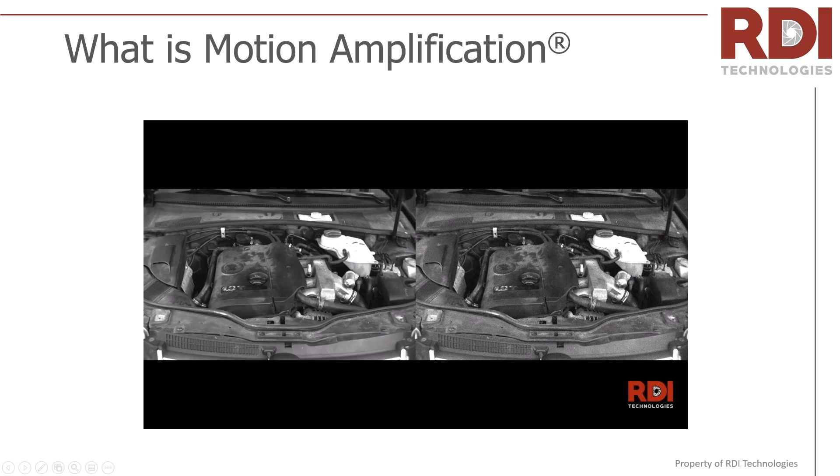So if you look at a car engine, you would essentially see not a whole lot. But with a motion amplification video of a car engine starting, you can actually see that. So there's the car engine starting. If cars aren't your thing, maybe motorcycles, you can look at a Harley. I didn't shoot this, but I'm told you didn't really need a whole lot of amplification for a Harley. But nonetheless, there's a Harley motion amplified.

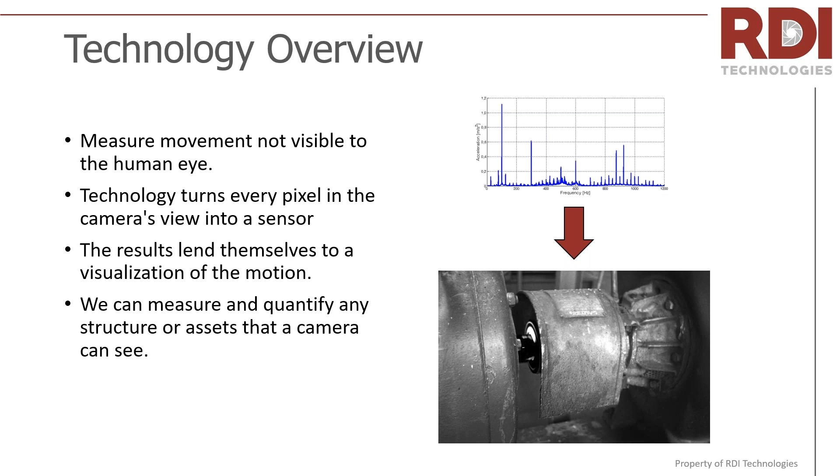So we're making motions that are invisible to the eye visible to the eye, essentially turning each pixel in the camera into a sensor, and then making a visualization of that. And then we can quantify that as well.

Just a little bit else in terms of the use or the benefits. If you go into traditional vibration, if you put one sensor down, that tells you a lot of information and you get a lot of value from that. You can put a second sensor down, and then you can do interesting things like phase, and you get more, and then a third channel.

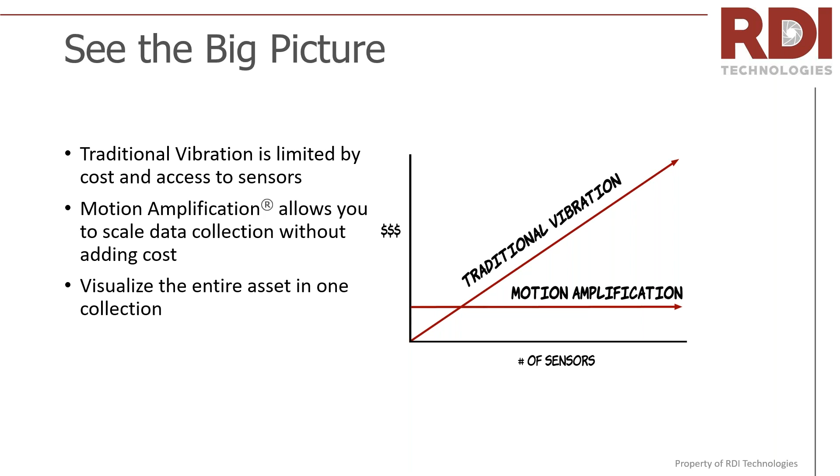And then you can start to outfit an asset, but it becomes kind of expensive and cumbersome if you start adding more and more sensors to an asset. So by the time you're up to a dozen or two, that's hard to manage in data and the collection. But with motion amplification, you can think of the pixel as being the sensor, and you add 1 pixel, 2 pixels; a megapixel is kind of a thing of the past even, where we're up to lots of megapixels. So you can add pixels and then increase your sensor coverage across the entire asset very, very simply.

So a little bit about some technical specifications. We're really measuring fundamentally displacement. That displacement measurement makes it really handy as a complementary tool to accelerometers. Accelerometers are a very common measuring device in this industry, and so now we add this displacement measurement, and it's a really good complement.

The system's capable of live motion amplification, and I'll do a demonstration of that. You set the camera down, and instantly you can see the amplification. You can amplify up to 500 times, and then you can show the overall and frequency-based motion. So you're not just limited to show one frequency or another or combination. The first video that you see is overall. It's all the motion, so that's really important because you need to make a decision about what you're looking at and to be able to see them all.

So it's really small detection capability, 0.01 mils. So really, the system's capable of seeing anything of interest or concern, and then some of the frequencies there that you can measure too. And then also it measures 2 axes. So you get an up, down, right, left measurement, and it's synchronous across the entire image. So that's really kind of cool because now you can do phase relationships. Everything is taken at the same time. So you can make a measurement in the right side of the image and the left side of the image and compare those.

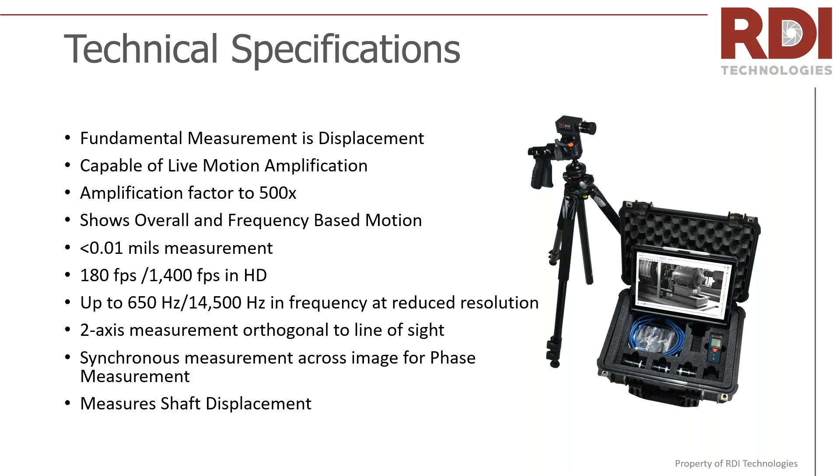And it also has the capability of measuring shafts while they're rotating. So a lot of people use it for measuring what we call the operational run out, while it's in operation, how much that shaft is moving. So a little bit about the family of what they are. The IRIS-M is, I would say, the standard motion amplification camera. You can add an MX to it. That's really just adding higher frequency. So if things are moving faster, you can see those things.

And then also the CM, which stands for continuous monitoring. 3 cameras simultaneously collecting, can do 90 minutes of data per camera in buffer, so it's kind of like a DVR. So that's kind of handy for lots of different reasons. It even does triggering with optical sensors. So you can draw a box and it will monitor that area continuously, and if something moves in that area by a certain amount, it saves the video, pre and post that trigger. So again, it's sort of a crash cart; you can put it on an asset and monitor overnight, a week, 2 weeks, however long you want.

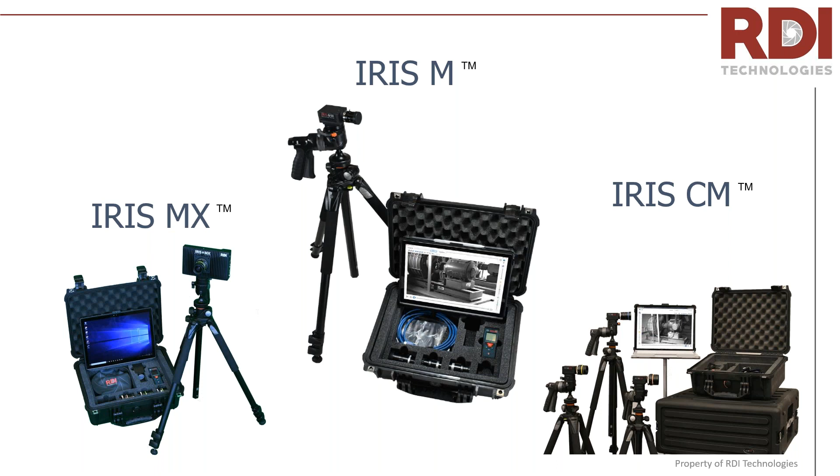Some of the benefits of the technology: it really is a root cause complementary tool. Motion amplification is not something that's going to replace the existing tools. You're still going to have your accelerometers, your ultrasound, your infrared. It's really just another tool in the toolbox that complements those other tools, and I'm going to talk through some of that and hopefully show you how it becomes a complementary tool.

It's a really advanced and sophisticated data analysis piece, but I also like to think of it as 1 part data analysis, 1 part communication tool. Because one of the nice things about it is that it can really help communications between technical and non-technical users. It's really easy to show someone that something's misaligned or something's loose just by a video.

I had one user tell me that he had been trying to get something fixed for 3 years, and he knew what the problem was. He had been working on it for 3 years, and he couldn't get action taken because the people that had to buy into it were not technical, and they didn't really understand. And so shortly after he started using the camera, he was able to show the video, and then immediately got that asset fixed. So that's a really powerful piece of that.

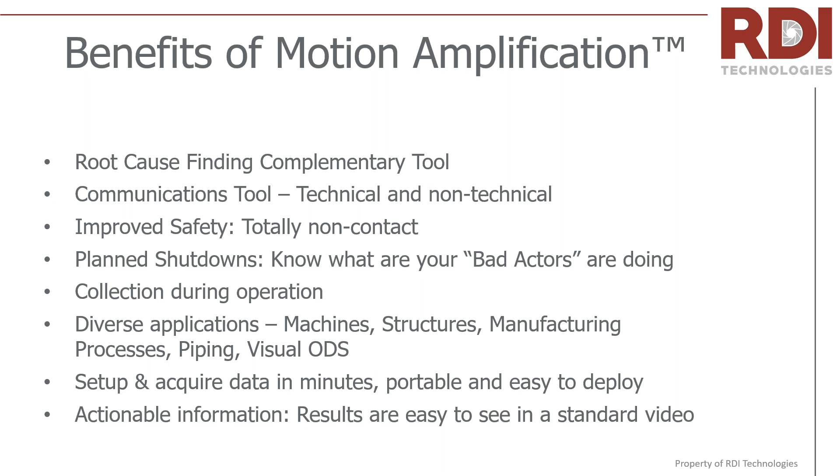A little bit about the industries. It doesn't have one preference for where people use it. Anywhere from pulp and paper to water treatment, automotive, and essentially anything that's moving. It's a very fundamental measurement type. It's measuring displacement, so it finds its home in a lot of different areas.

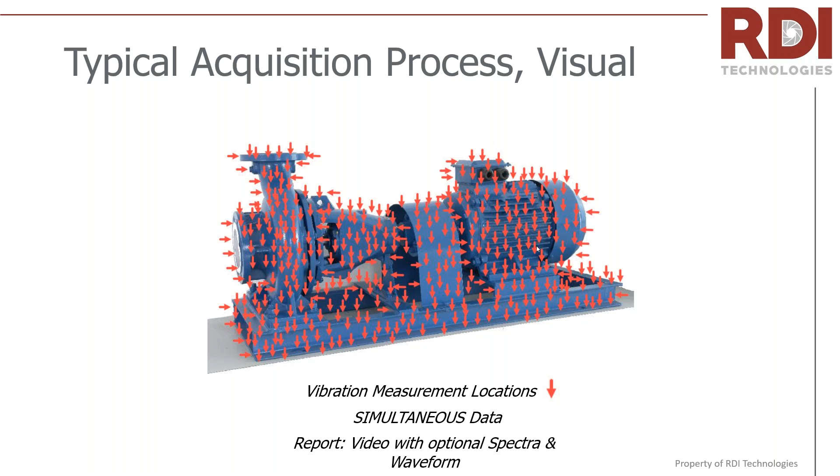It's a really cool tool for the you-don't-know-what-you-don't-know sort of thing, and I'll talk about that later in more detail. Sometimes you see things that you weren't even looking for, you didn't know were there, and it wasn't what you were focusing on, but it ends up being the biggest problem. Again, because you're looking at more than one location.

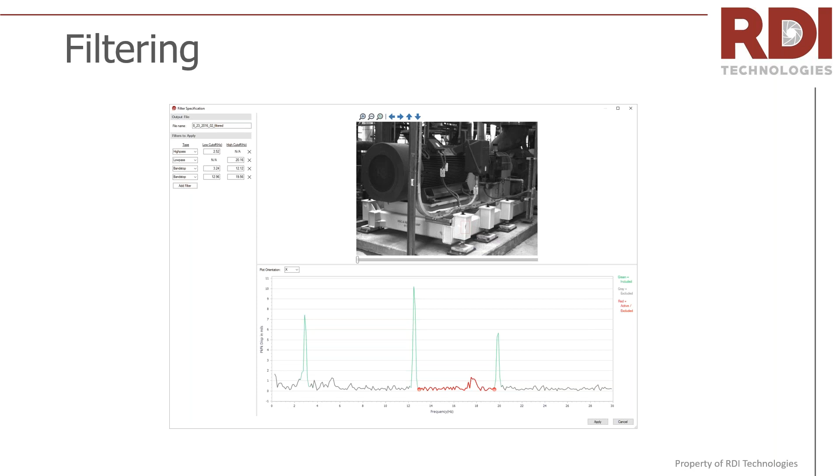So some of the core pieces with this. It's the filtering here. You notice there's a spectrum. You can draw a box anywhere in the video and make a measurement, and it gives you a time waveform in both the X and the Y, a frequency spectrum, and an orbit. You can draw as many as you want and do comparisons across different areas. But this is filtering. You can create any combination of filter you want if you only want to show certain frequencies. I'll walk through a short video about filtering.

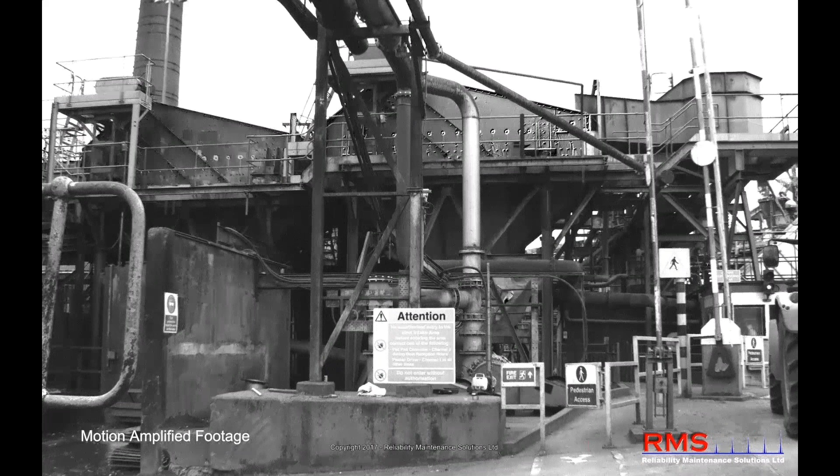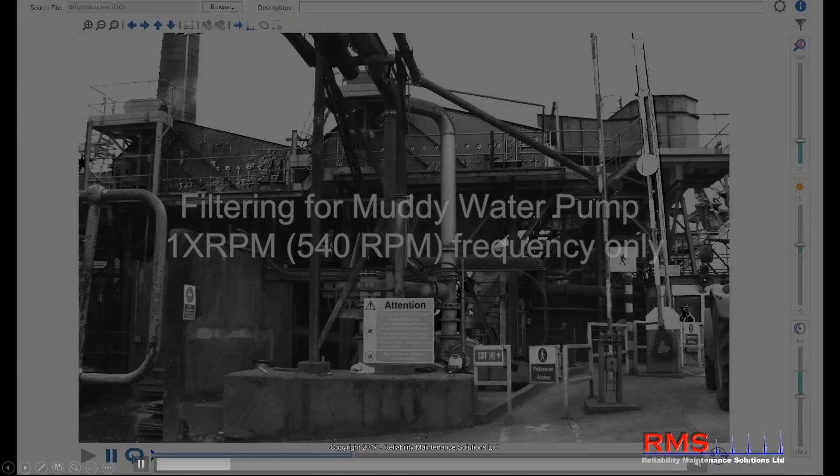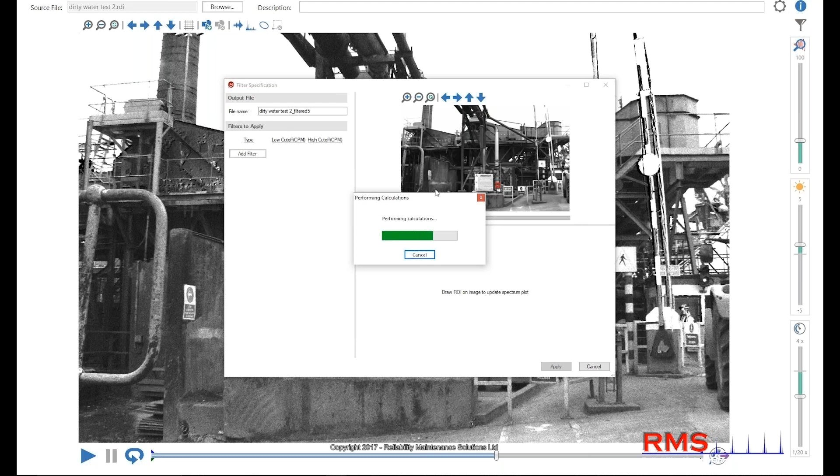So what's going on here, let's see if that's playing. These screens are moving at different frequencies. What we're going to do is filter for an individual frequency and show you the power behind the filtering process. So we're picking a frequency here and filtering for that frequency.

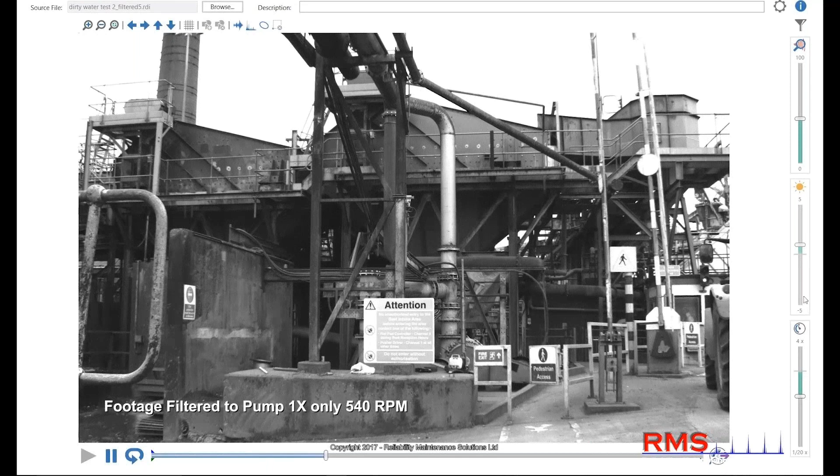And now we can see we've got the peak here. We made a measurement. We're going to slide the sliders over and pick an individual frequency, and then process for that frequency and show just that one frequency. I think there's a slight delay in the video. So now we're showing only the pump motion here.

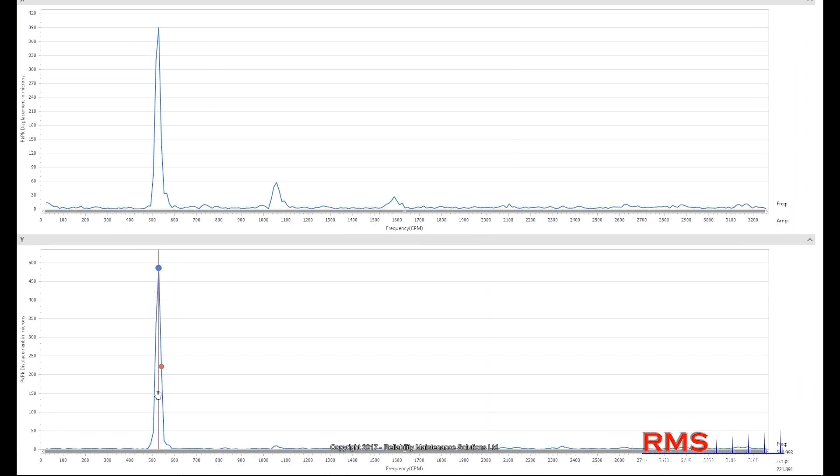And we can also do the same for the footage for the individual screens. So we'll measure the pump and show the spectrum for that. You can get the spectrum and the time waveform. And there's the motion amplification footage for the pump. Now we're going to isolate the 925 RPM. And now we'll isolate the 841 RPM.

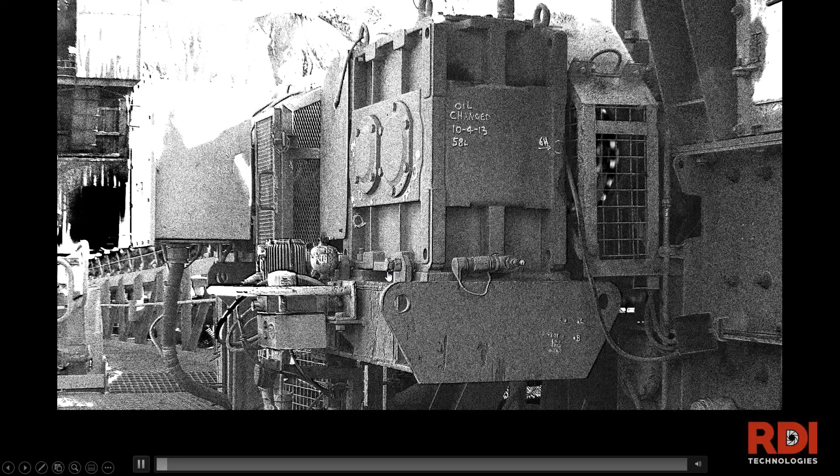Okay, so that's just a little bit about the filtering there. Again, this would be a typical acquisition that we'd do of a gearbox that would be moving, and then we can filter that, for example, the output frequency of the gearbox at 2 hertz. And then here's the 25 hertz for just that motor.

And then again, here's another frequency in the background. Something that was not very obvious, but was actually the conveyor bouncing there, which actually ended up being the biggest issue of all, and was unbeknownst to them.

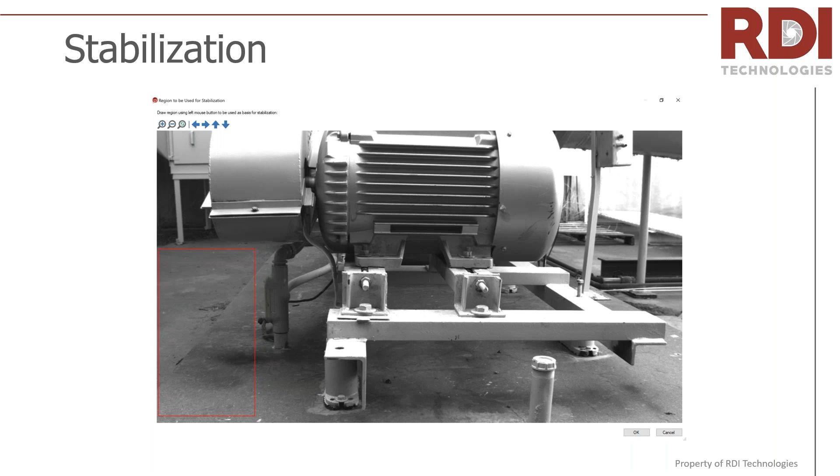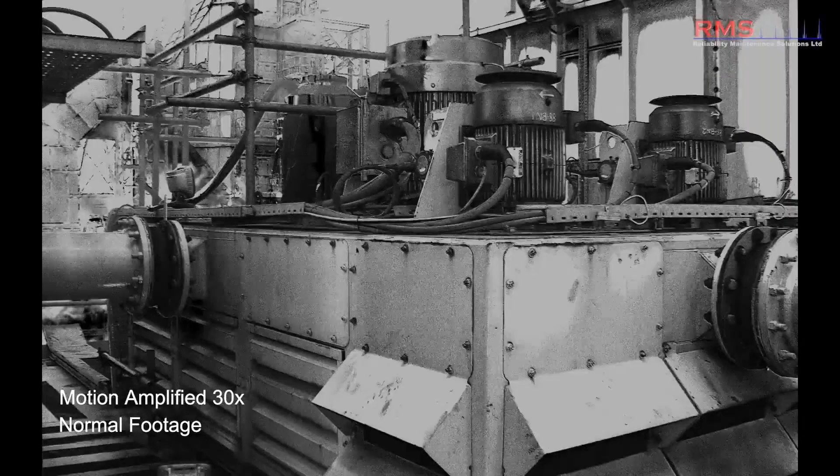There's also the ability to add stabilization, so that becomes important, especially if you're on a platform that's moving, and you can't always just filter it out. Sometimes they're at the same frequency, and so the stabilization works to remove the camera shake. So a little bit of a demonstration of how that works. I'll show some of the unstabilized footage where you can see the motion overall, and then the stabilized footage.

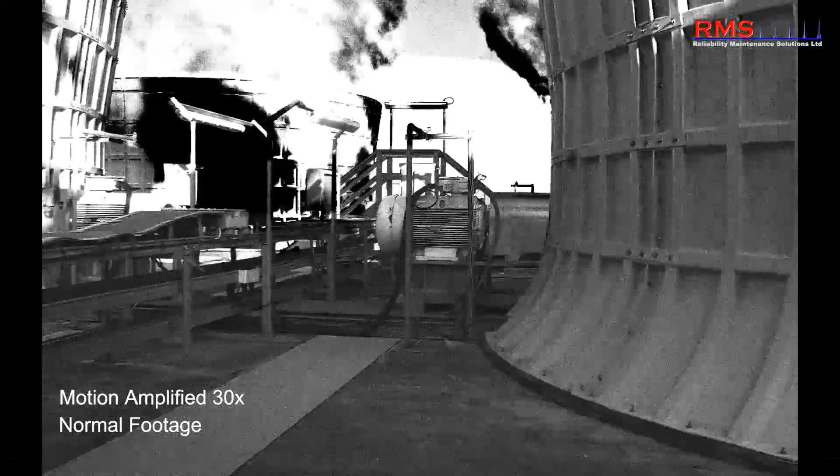And then here's another shot of the stabilization footage. Now this was again all on a roof, so you can imagine the vibrations that would occur from the floor.

Okay, so let me do a quick demonstration here. I think there's slight lag, so I apologize if I get ahead. I'm trying to watch the audience view here to make sure that it's caught up.

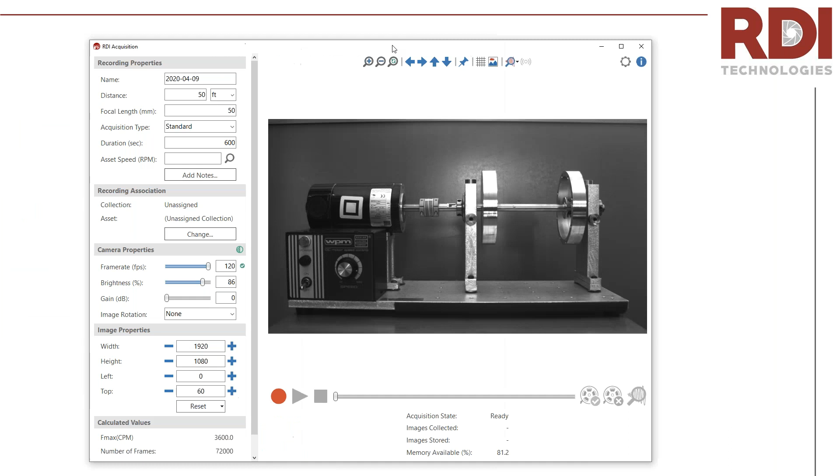So let me do a demonstration. I'm going to do this live of the software. I'll pull the acquisition software over here. Okay, so this is the acquisition software. Again, it's pretty simple point and shoot. I'm going to turn this rotor kit on. I mentioned you can do live motion amplification. So you can just press this button here, and now you've got live motion amplification. You can see the rotor kit move here, and then you can amplify it and see it bounce.

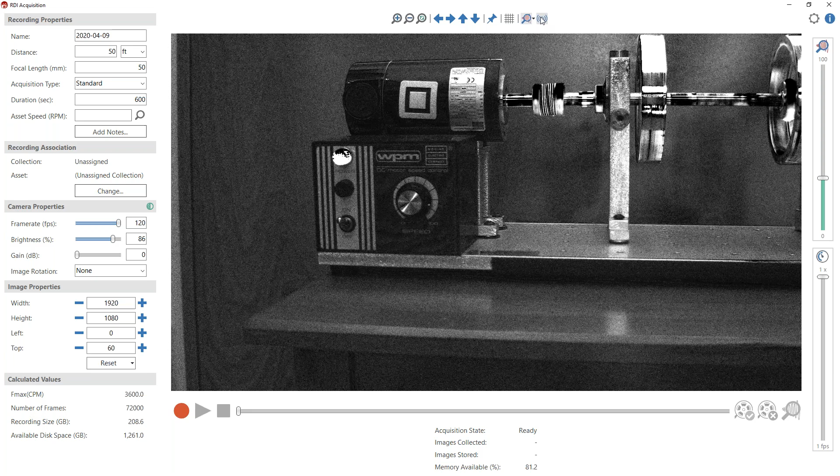And you can increase or decrease the amplification, slow it down if you want. So this is really handy. You can just immediately scan assets. You can move this around. If you want to look at the base, you can scan around and look at the base here. Or if you move over to this side, you can see that part of the base or just anywhere. So you can just immediately set this camera down, get the amplification showing very easily, and scan entire assets in a matter of seconds.

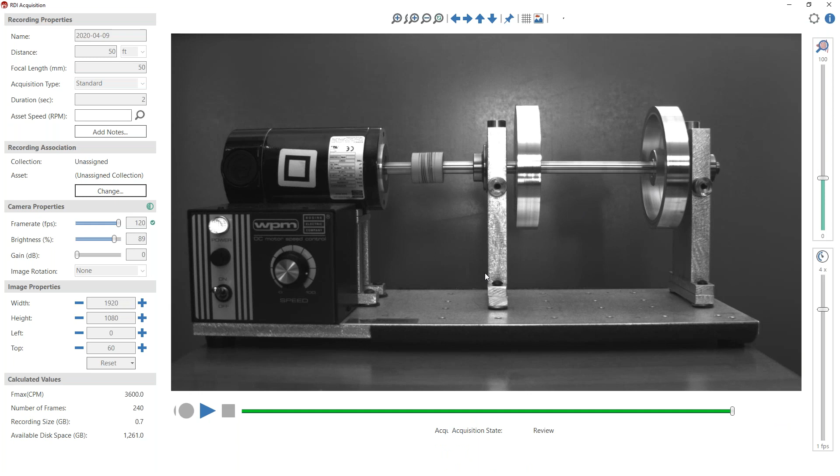And then I'm going to take a short recording. I'll do a short 2-second recording here and then demonstrate some of the capabilities. I'll turn the live amplification off because I'm going to do a recording. So I'll do 2 seconds here really quickly. I'll go straight into motion amplification here. Okay, so one thing to notice is that in motion amplification, it takes zero time to process anything. So I can go straight into amplification like this and see this very quickly.

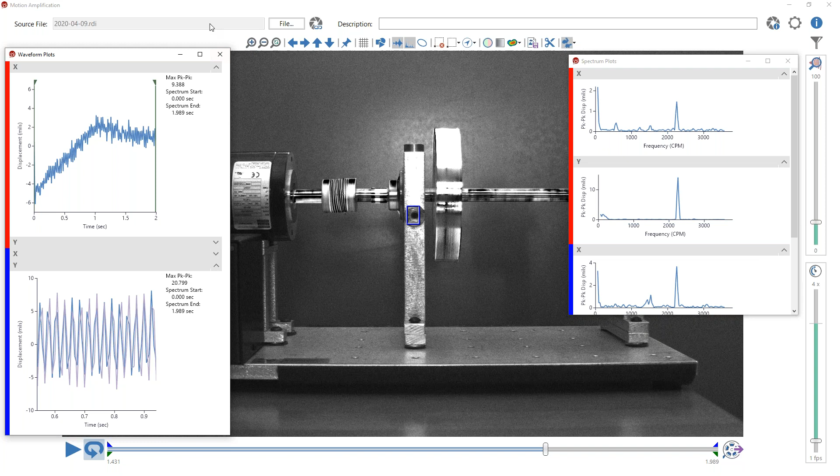And then you can make measurements just like this. If I wanted to make a measurement here, I could do that. If I wanted to make a measurement here, I could do that. Again, that's all instant. And to do phase measurements, I can drag and drop one onto the other, and I can see that those two areas are pretty close to being in phase. On that bottom graph, you can see that they're in phase. So a real easy way to do this, really quick.

So that's just a little bit about the software. I'll turn the rotor kit off. You can see how that works and the speed at which you can get that. Again, the live amplification is fairly handy for looking at things like pipe work and that sort of thing.

Okay, so let's talk about the integration into a reliability program and how that works with some of the use cases. Here we're going to talk about bad actors, some different use cases with bad actors and complex assets, getting motion amplification used and the technology higher on the PF curve, or in this case the DIPF curve. So in the design, installation and commissioning phase, how it's complementary to a route-based method. And then new types of assets with the lack of coverage. Things like pipes and bases and foundations really largely go unmonitored because they're a challenge.

And then also to broaden the coverage, so maybe lower on the criticality scale. So maybe you've gone through and you've got your routes that you're monitoring certain assets, but maybe there's certain things that are left off those, or there's certain things that don't get as big of a look or get covered at all. But the speed at which the technology can work, with being able to go down and set it down and see things live and be able to measure on the spot, gives you the ability to look at a whole new level of assets in your facility.

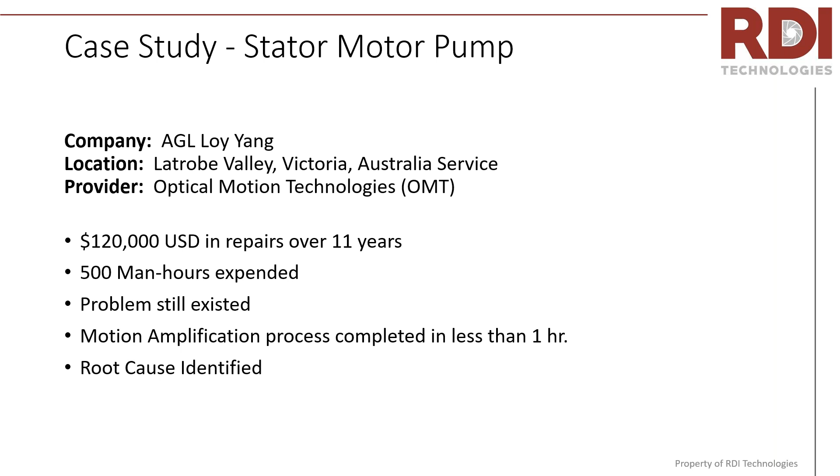And so motion amplification was used, and within an hour they were able to identify the root cause of it. So we're going to walk through that through videos. But what it ended up being, and you can watch through this, is the structural integrity of the base. They were able to capture that and understand where that problem was, and now they're confident that this asset has been repaired properly.

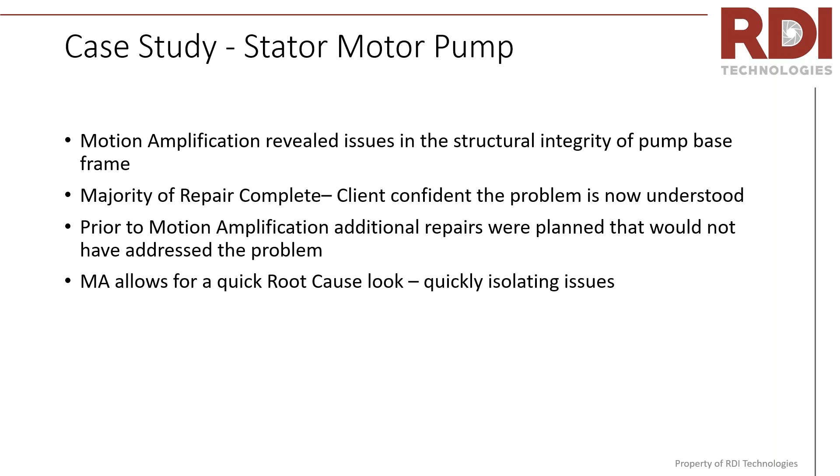One of the real kickers was that prior to motion amplification, they had planned to do a whole new set of repairs on this. And as it turns out, those repairs would not have fixed it. So that 120,000 would have ticked up just a little bit. So the MA allowed for quick root cause and identification of the issue. So here we're going to look at this motor pump combination.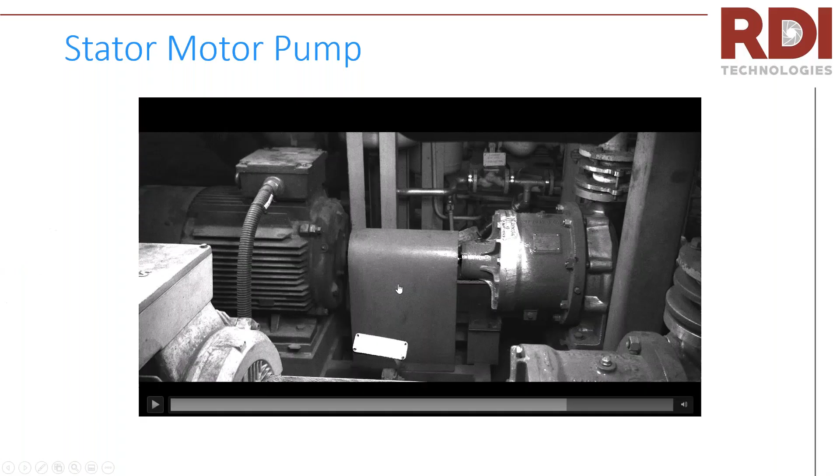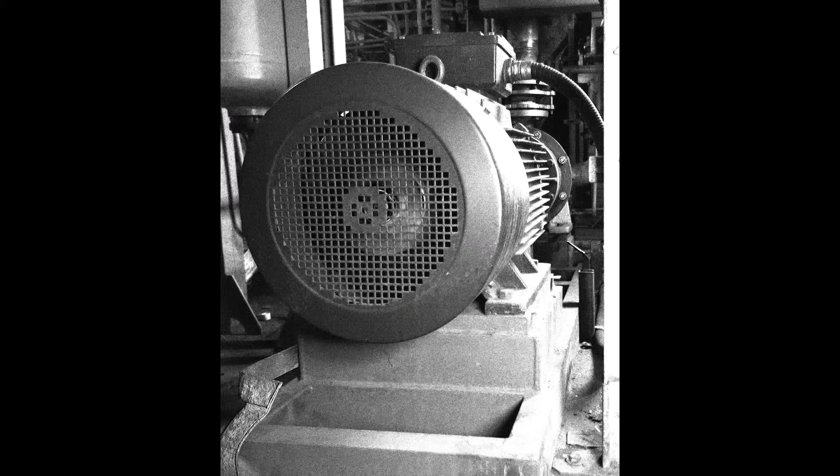So here you can see the pump motor. Immediately you can kind of see with this issue what's going on with it as it's moving so much. So we're going to take a look all the way around it. You can kind of see it move on its base. And then we'll take a look. This is pretty common, the way that the person scanned all the way around.

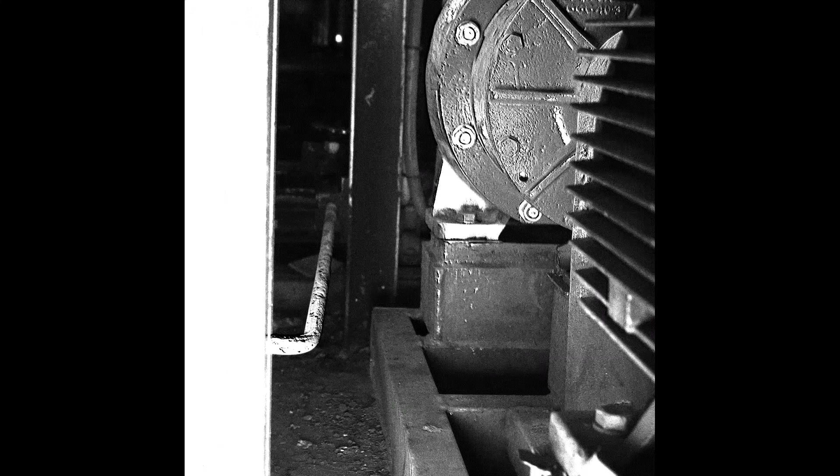And you're going to get a good look here right now at the base issue. And then we'll show some measurements where they actually went in to confirm this. So you can see this is one of the shots that actually clued them in to where the corrective action needed to happen. We'll take a closer look here. And then here's a shot on the other side as well.

So this shot I like because it shows, I think, where they put a lot of their attention. They really were chasing the vibration, just finding the areas where the high vibration levels were and stiffening it, which could have actually caused more problems than it helped, in that it transferred some of the energy back into this motor and pump. But you can see where they had added braces and supports, probably because the vibrations were just high there.

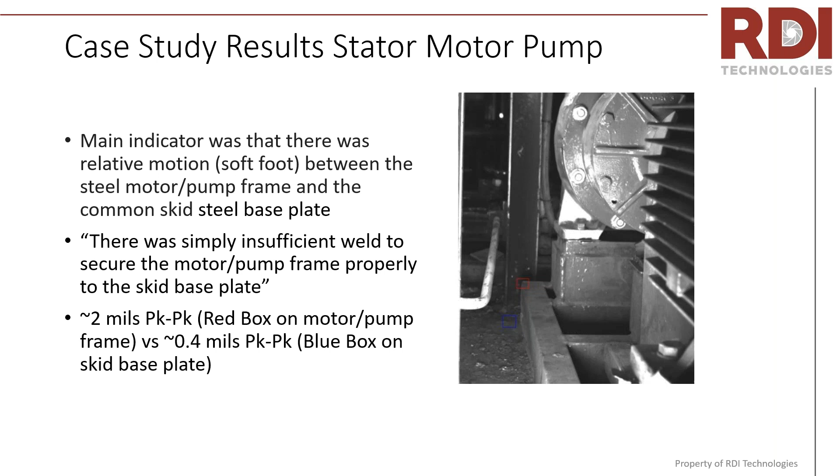And so here you can see where they made the measurement. I'll see if I can highlight this where my mouse is moving. There's a red square on that base and a blue square on that base. And it turns out on the upper there was about 2 mils peak to peak, and on the lower there was 0.4 mils peak to peak. So there was a difference there. One was moving more than the other, which clued them in on the base being insufficient. And so the root cause was identified.

Here, the root cause was identified. Vibration was reduced from over 0.5 inch per second to about 0.15 inches per second. And this was before doing an alignment. Again, I didn't get the numbers after the alignment, but I think there would have been an expectation for those values to go down.

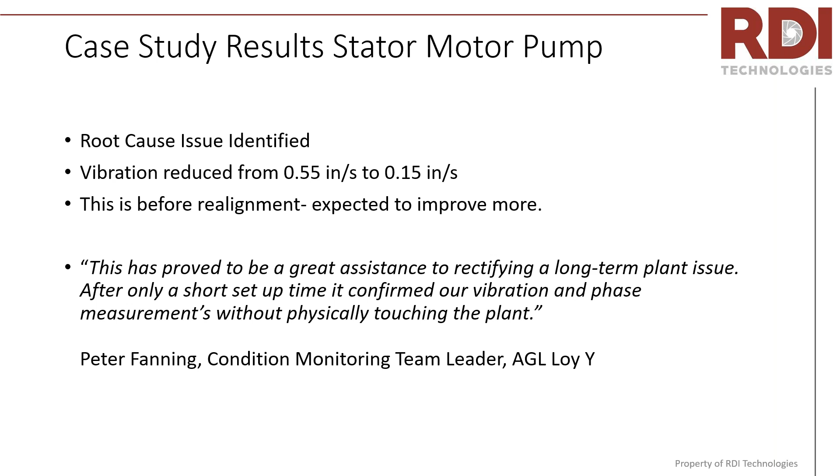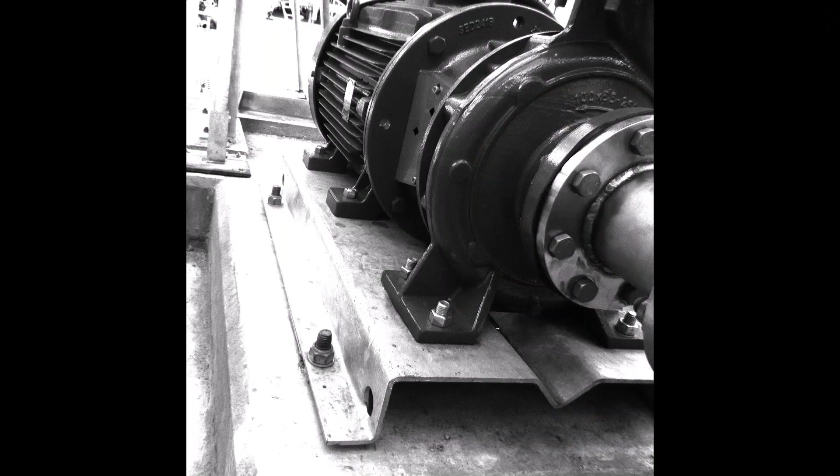So this video is not the same, but I like showing it because it shows the repairs. So you'll see the repairs, and it's just a nice video to show how simple the repair is, but it's not always obvious. You know, hindsight's 20/20, so it's really easy once you see it in the video to think you should have seen it all along, but that's not always the case.

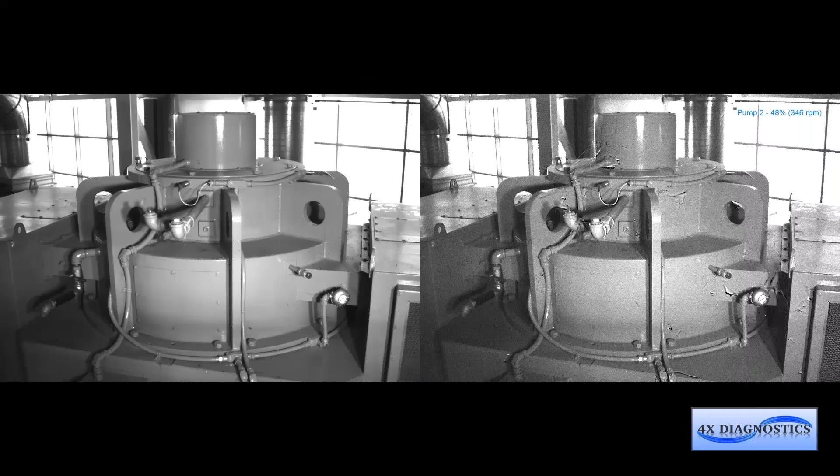Here's another challenging one of a torsional resonance in a pump, and this is tricky. They had quite a few sensors on this already, over 20 sensors, but they couldn't capture this torsional mode, so they brought the camera out as the only way to really capture it in the scenario they were under. So again, they were able to capture it because they could see it and identify it. And again, this was one of those identifying the mode, identifying the frequency, and then knowing what frequencies they need to get through while they're bringing this thing up online to not hit those frequencies.

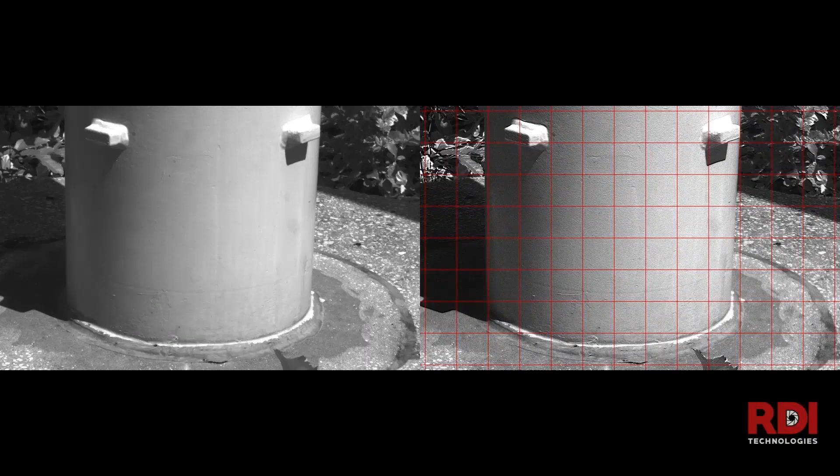And then one more, which is a roller coaster, and this is actually the roller coaster when the coaster goes over and it's lifting. So again, this was a scenario where you can't go in and make contact, especially while it's in operation. Also, you've got to worry about people seeing you if you're in an amusement park, that sort of thing. So you could go in and make this measurement and find out how much that lifting was occurring with the camera, and visualize it as well.

A lot of times what ends up happening is this circular thing where if you don't identify the root cause, you repair something, maybe a looseness that's caused from something else that's gotten worse over time and worn itself loose. So you do that, and then eventually it comes back, and then it's cyclical. Whereas with the IRISM, what we like to try to educate people is get into the design and installation and commissioning side of things, so that you get more bang for your buck in putting it in that area.

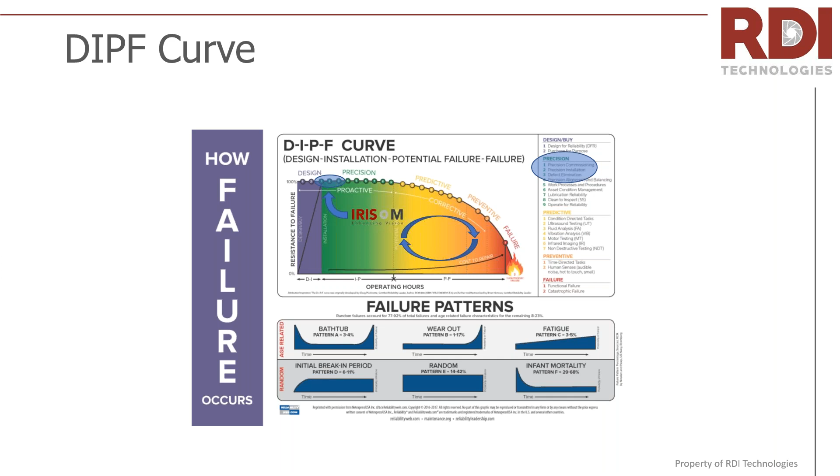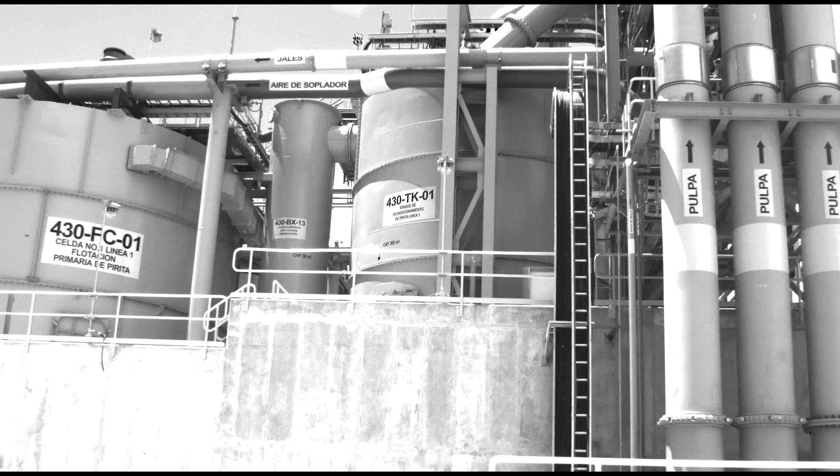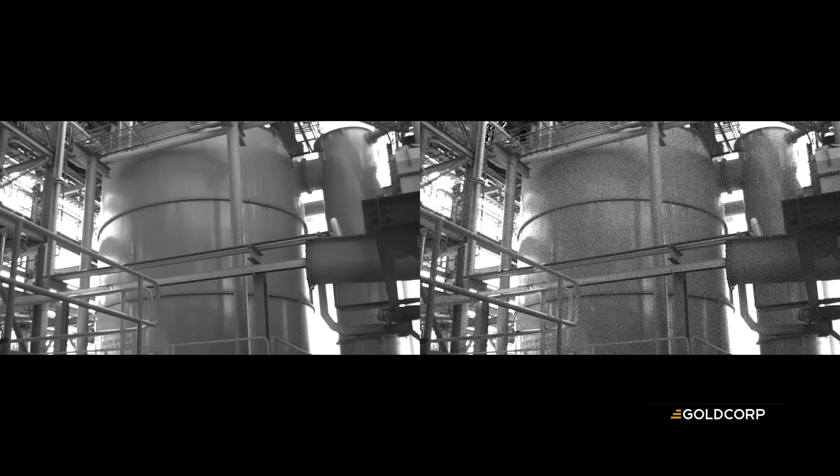And so we'll talk here about a commissioning of a new facility, a mining facility in Mexico with Goldcorp, where they had brought it in to bring a new facility online, and they found this tank. This was one of the first things that they looked at. What they did is they did acceptance criteria with the camera for every new asset. So as this facility was coming online, anything that was coming online had to be looked at with the camera, and they found this. And here's the back view of that tank.

And of course, the conversation goes something like this. Hey, there's a problem with this tank, to the OEM. The OEM says, nope, this is not our issue. Everything was fine. And then you show them the video, and that conversation quickly changes. And that's the case here. They said, yeah, you're right. We got to get in and fix that. And so the OEM did come in and fix it on their dime. And then this was the repair shot, where everything looks good. Still some movement, which is normal to have some, but it just wasn't acceptable for it to be at the level it was before.

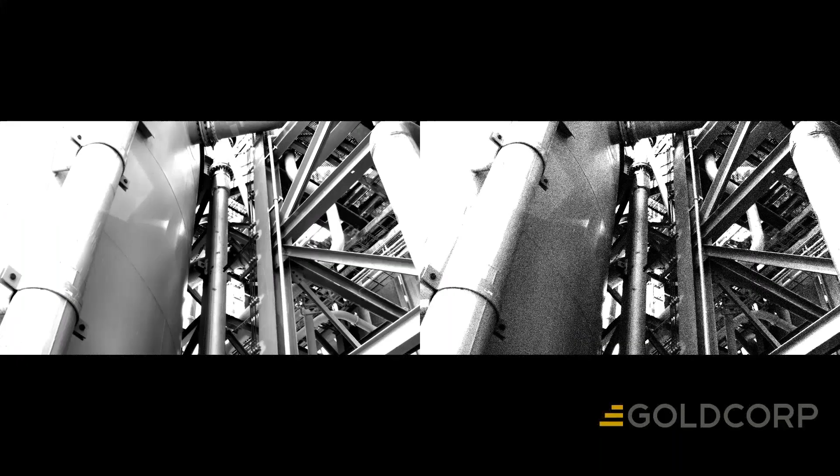And then there was also SO2, 500 degrees C gas flowing through these pipes. And they found a heavy vibration. It would have caused a failure.

It would have eventually caused fatiguing and caused a failure, which would have been deadly at that point. And so this turned out to be an as-designed and as-built spec that did not match. So they sent it back to the engineers, and it turned out they just didn't build it right. They designed it right, but didn't build it right. And so this was a catch by them. Again, tying commissioning to this. Again, it kind of goes to the speed at which you can do this.

Okay, so let's talk about how it's complementary to route-based methods. There's a large group of users who simply tie it to route-based methods, in the sense that they do their normal routes. This isn't necessarily something everybody's replacing routes with, but when they get an alarm, this is a technology that they will go to. Because they can get a high two times, and it can be 20 different things. Some are more common than others, right? You've got your looseness, some things that might generally be more common, but sometimes you're kind of chasing that vibration.

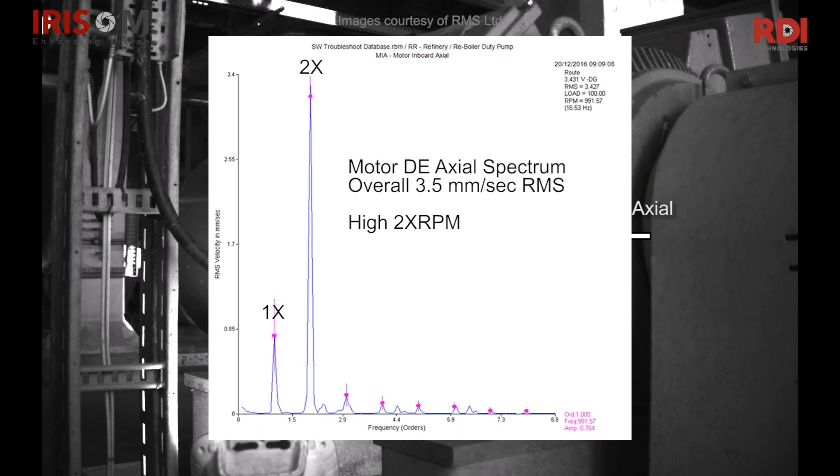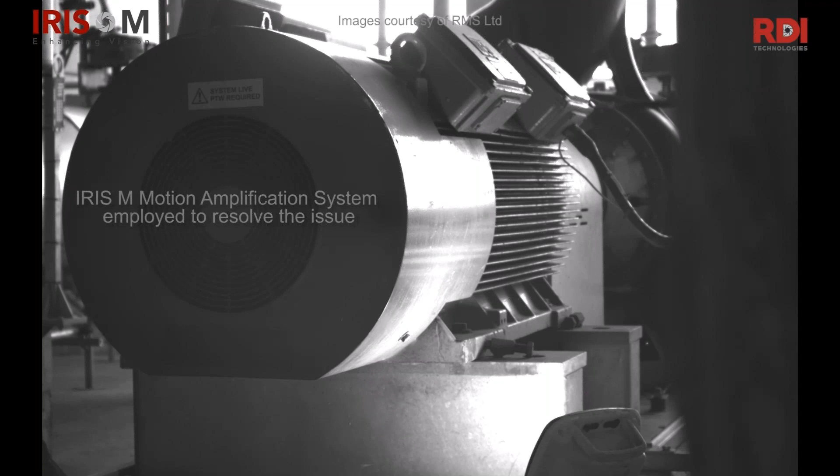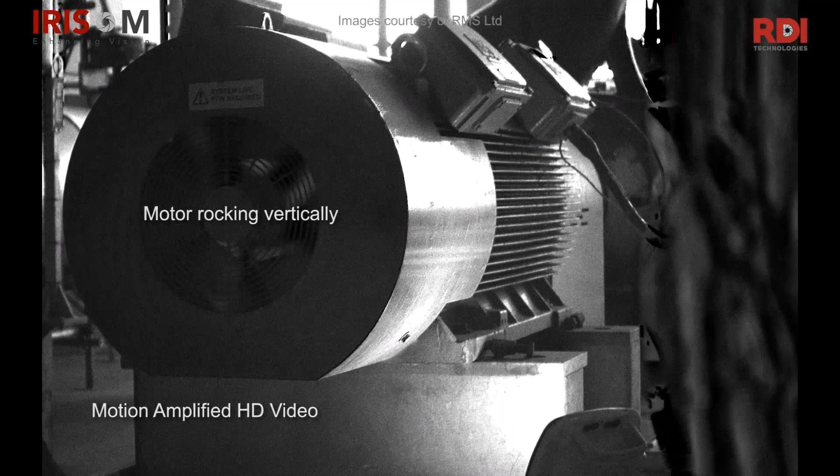And so in this case study, it's showing you the vibration levels the thing was experiencing, the high 2 times in this case. They checked everything: alignment was good, no soft foot issues. So they brought in the IRIS M camera to take a look, and they shot it. Here's the standard HD video of the motor running, and then they apply the motion amplification footage, and you'll be able to see the motor vibrating, which you expect.

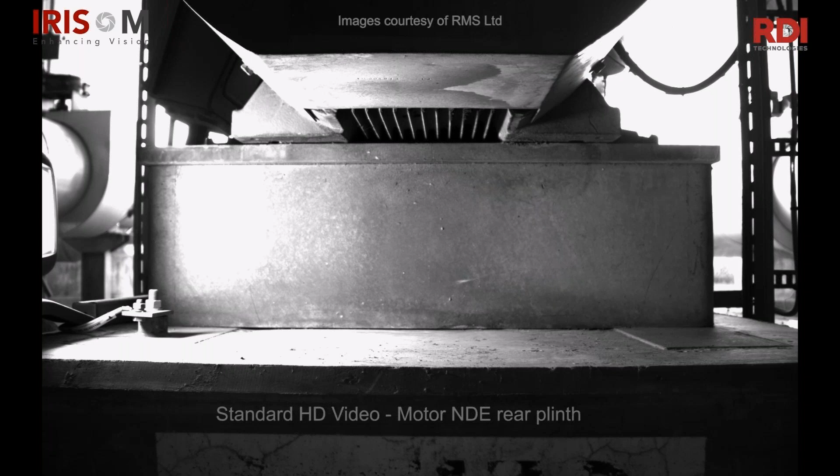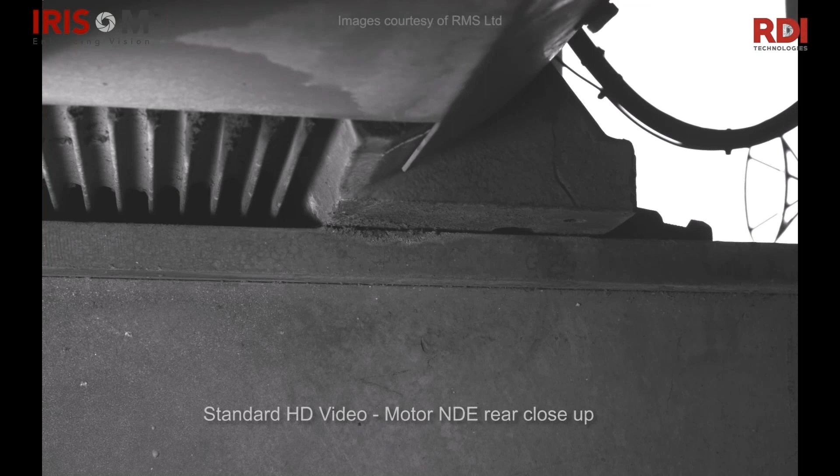Everything's going to move to some degree, but it's really trying to find out what's the root cause of this vibration issue, which turns out to be really challenging in this case, because you don't always look in these areas or think to put a sensor down here. And this turns out to be a case where there was separation, in the video, between the base and the support there. Again, really trivial to show with the camera, but very challenging to do with normal contact sensors.

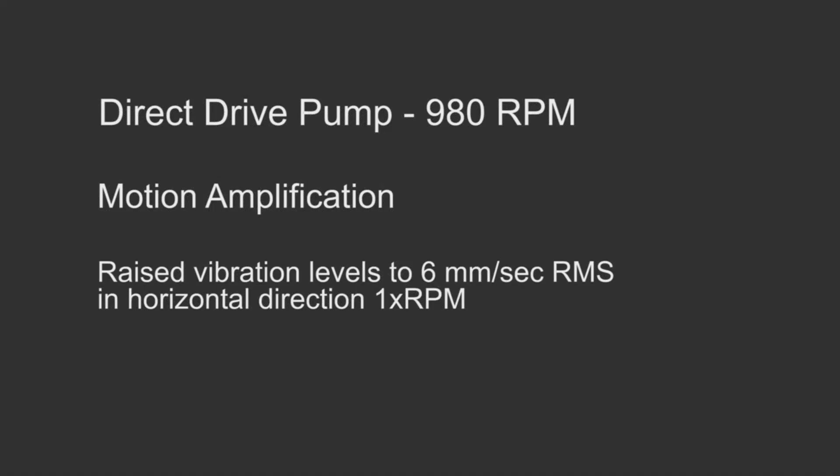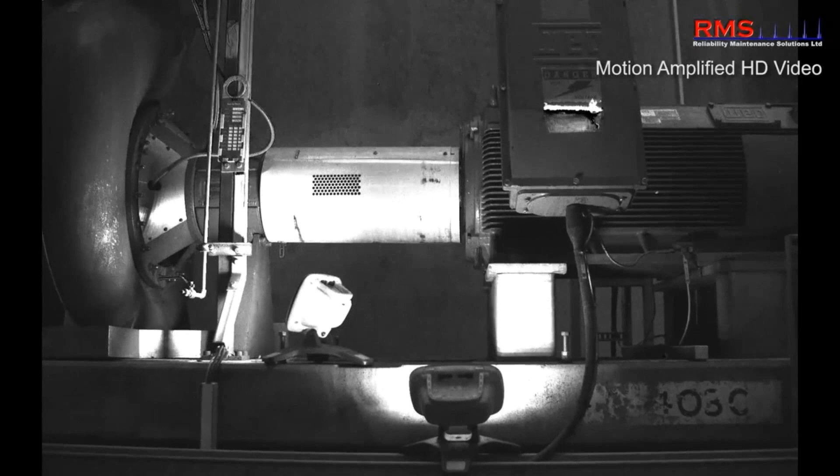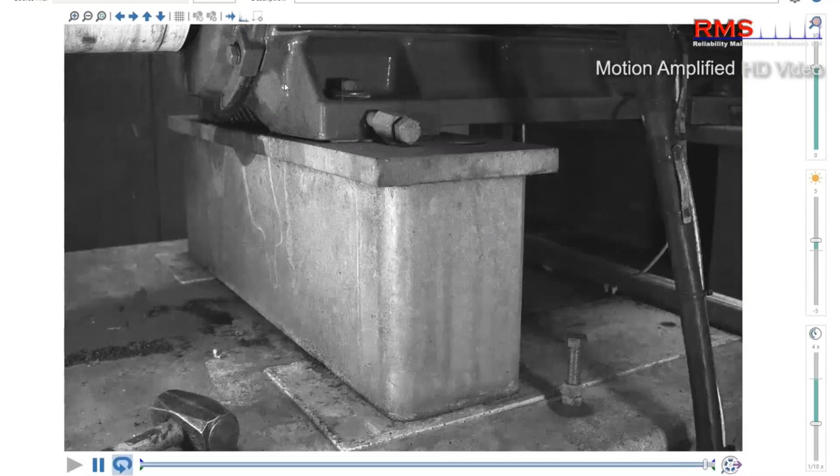Another one. This was again a route-based measurement, tying in with route-based, where the amplification was brought in. They get a high vibration reading, it triggers the alarm. What I like about this is that it was immediately corrected. They were able to get an alarm level, bring out the camera, find the issue with the camera, and then immediately fix it. It turned out to be a trivial issue, right? And that's great, in some ways that's what you want to find. But it's really about finding that issue, and with the camera it becomes a little bit easier to do that.

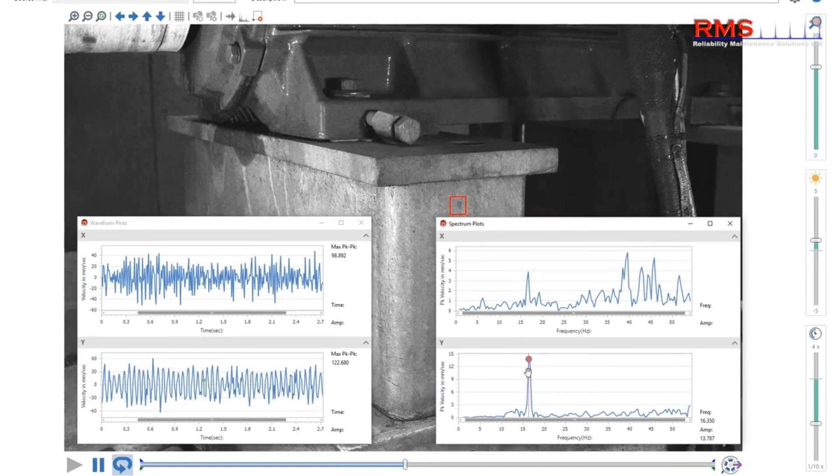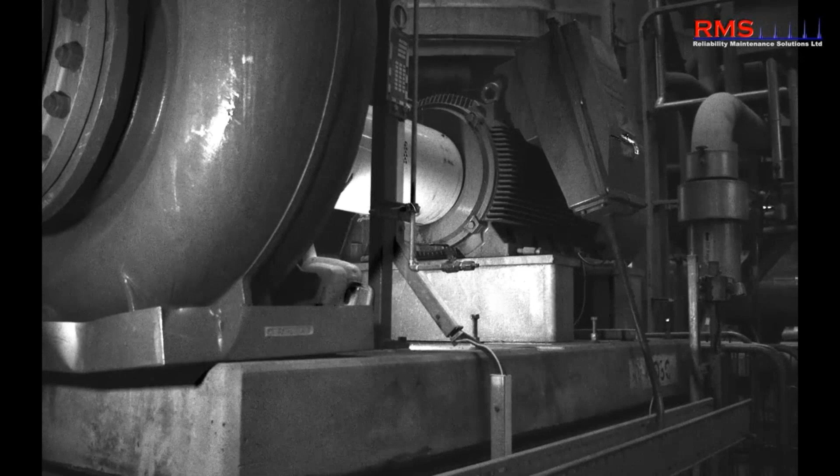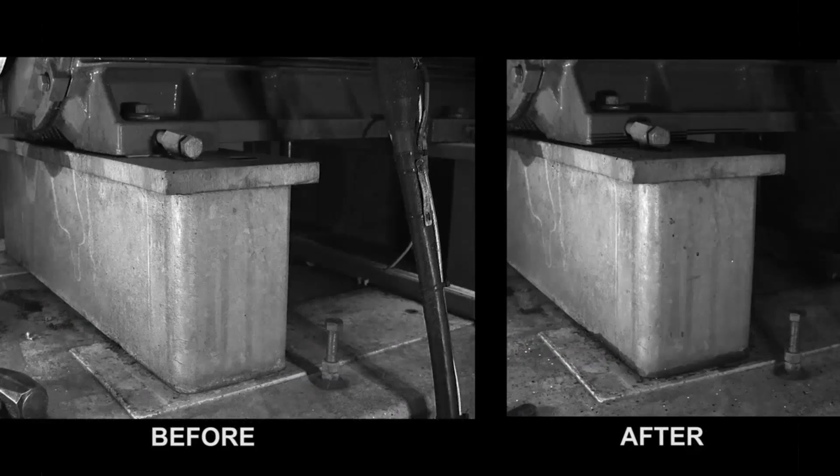So they found this base sliding, and it turned out they needed to tighten it down. They were able to go in, look at it, and this was all done in the course of 30 minutes, a really quick process from getting the alarm, getting the camera, making the repair, and moving on. Here we're showing the motion and vibration of this thing sliding, then a shot where they issued the work order and tightened down all the holding bolts. I like this because the case study shows a couple shots of them actually doing the repair. And then a 60% reduction in vibration levels. There's a before and after.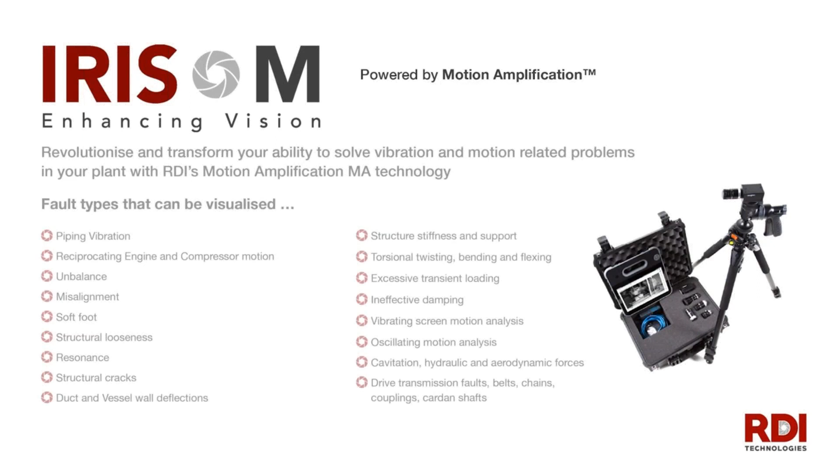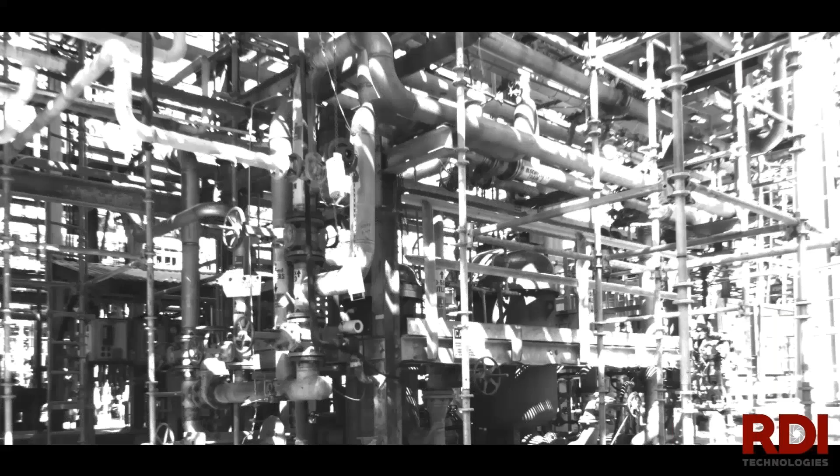So the next one, in terms of where it fits into reliability, would be new types of assets with a lack of coverage. The first one I want to focus on is piping. This is a real big issue, often a safety issue, and a big challenge. Where do you even start? With a camera, you're able to set it down and scan a very large area in a very short time, see all this motion, and pick what is good and what is bad. You can measure it all and then make a course of action. With live amplification, you set the camera down and you see it. You don't even have to take a recording. You scan the entire thing in seconds and see all the vibration everywhere.

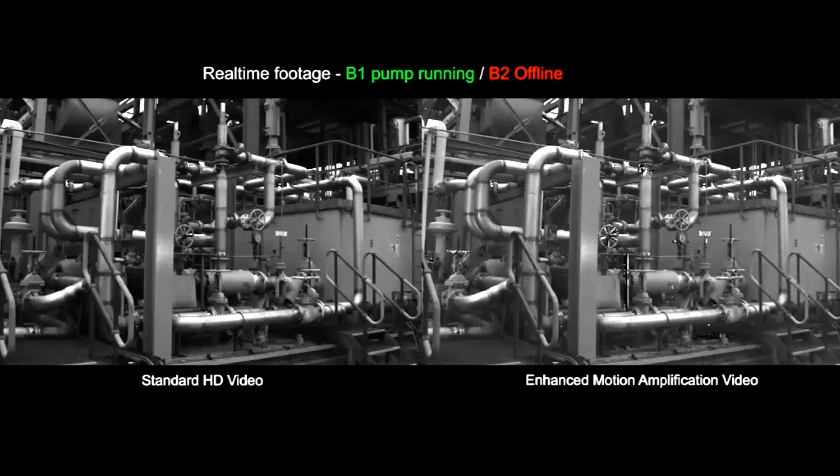So that's one. And here's another piping example with a bit more complicated environment. Here's again amplified and unamplified footage. Right side's amplified, left side's unamplified.

And then to be able to go in and make a decision. Here, it was quick enough that they could do this entire area with different scenarios, with different pumps running, so as to be able to see what was going on and then make a decision right then and there. Again, real quick, no outfitting with sensors. This is all done pretty rapidly.

Okay, so let's talk a little bit about broadening the coverage. So again, you might have a certain percentage of your assets covered with some technologies, some with accelerometers, some with others. But the idea is that because the speed of the camera is so quick and it covers such a large area, you can encompass a larger set of assets. So maybe that small motor and that pump that don't get covered now can be covered. You can look at it pretty quickly.

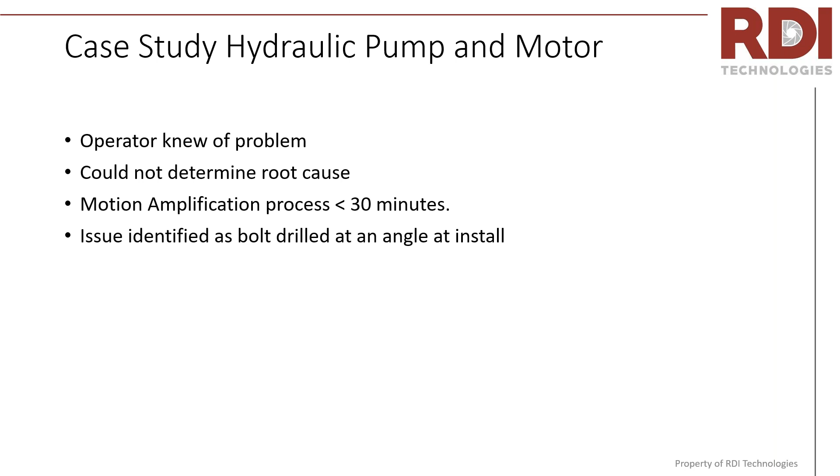And so this is one of those where the operator knew of the problem. He's known it's existed for a while, but no action was being taken. But again, if you're able to just spend 30 minutes on the problem, then that becomes something that people sign off on. And so it becomes easy to be able to get the camera in. So again, here you go in and look at it.

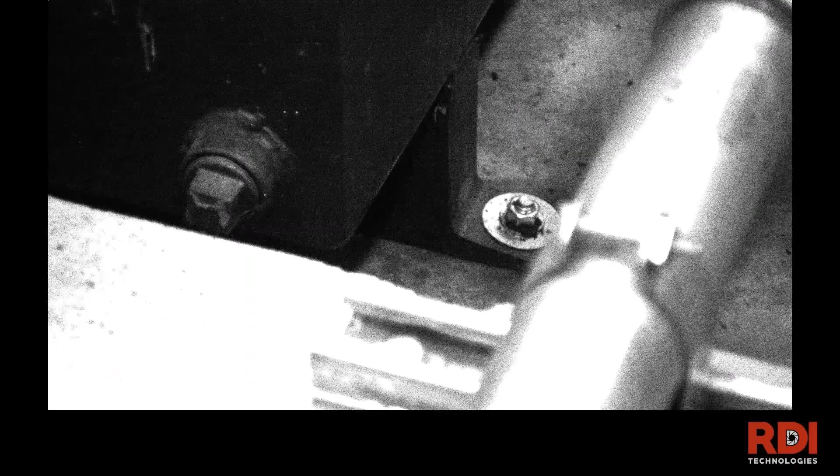We're sort of chasing this vibration by scanning around. We look at the feet to be able to see. We determine that one foot's not vibrating. So that's good. Let's continue the scan around the asset. Again, this is something that just might not be covered, because it's just not the criticality, the value of the asset. Oh, so we can see one side of that vibrating, and then we can see that foot now vibrating. And this turns out to be the issue.

We catch it. It turns out that bolt was drilled at an angle when it was installed. This flaw had been there from the beginning, and pulling it back out and then re-drilling it at the proper angle ended up being the solution.

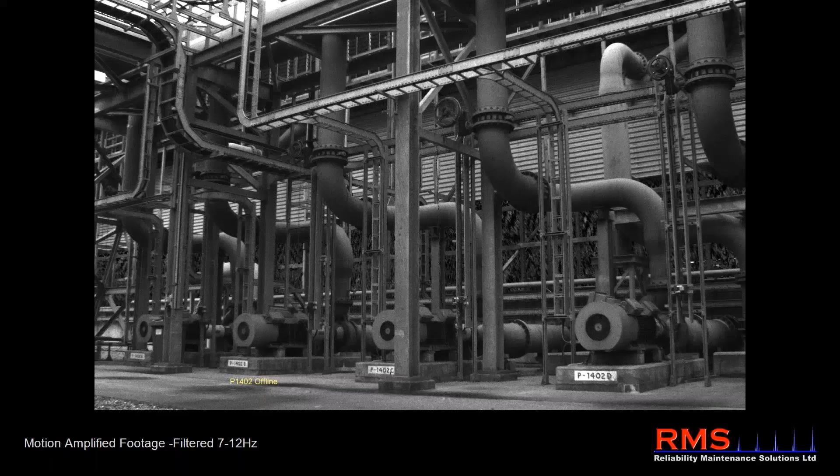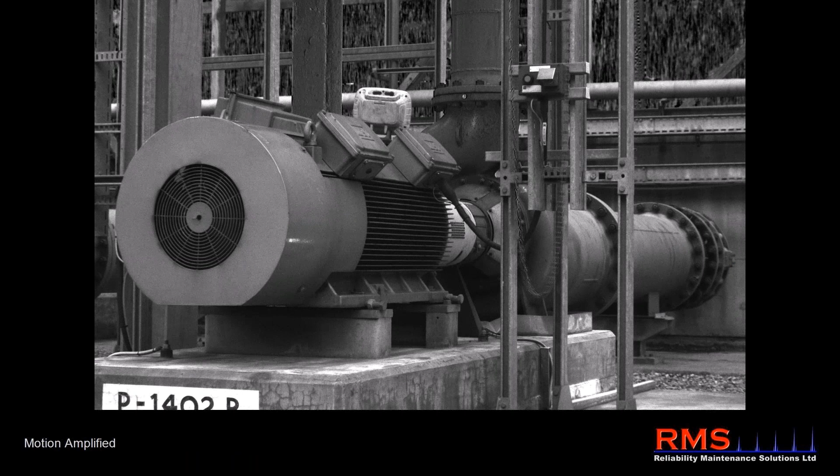So, a comprehensive scan. This is another area where, again, you don't know what you don't know, and this is one of those things where you go through and you're really surprised to see. This was a complete scan. There was nothing that brought them to this. They were going to do a scan of these pumps and the motors, and they came across this issue. So again, this is one of those that would have been a real challenge.

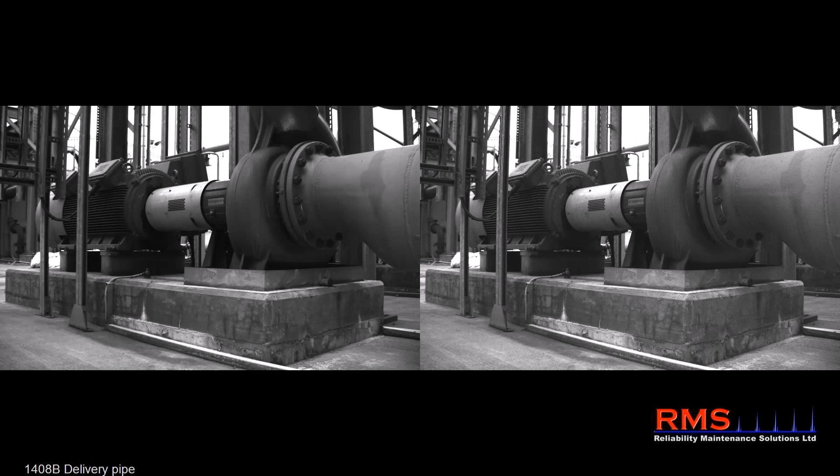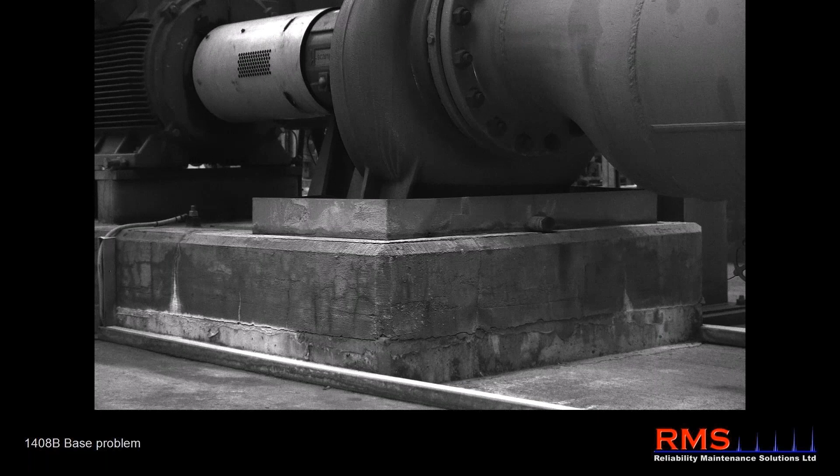We're going to see a shot here in a second where it's a concrete issue, being loose. And you can see this lifting in this concrete. Again, to be able to get an accelerometer or some other technology in here would have been a challenge, and that's why we say this is a really good complementary tool to be able to get in there and look at this sort of thing with a camera.

Okay, so we're getting close to the end. We just did a big software release, so I'll talk about some of the new features here in 3.0. We talked about live motion amplification. That actually just got released. Set the camera down, no wait time. You're live. You can scan areas in an instant and very rapidly with the technology.

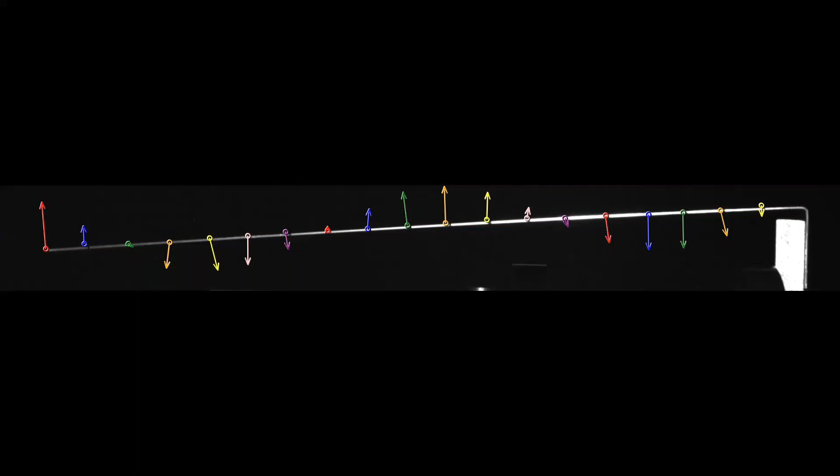Also, motion vectors. These are kind of cool because they really show relationships easily. So you can really help educate people with things like phase. One vector is going up on one side while the other is going down, that sort of thing. They really demonstrate motion well. Just another way of being able to show it. You don't have to amplify the video to put these on. So if that becomes a distraction, you can put the vectors on.

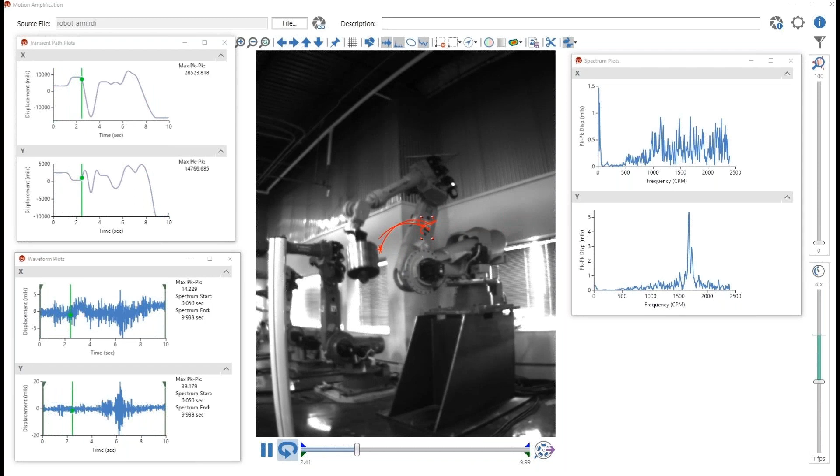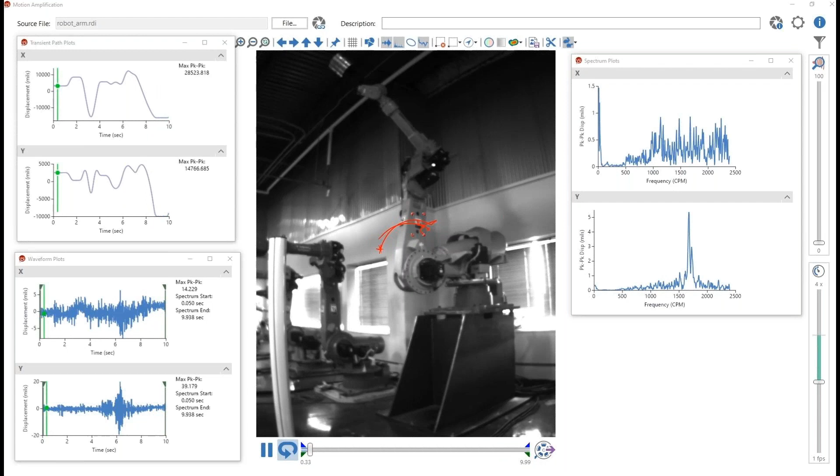Transient ROIs, kind of cool. Up until now, it really was about a fixed object that was vibrating. Now you have the capability of tracking motion all through the video, measuring the global motion of that object and the dynamic motion, the vibration, as that thing moves. So with overhead cranes and robots, you can actually measure vibration and get spectrum of moving objects, dynamic and transient data. So like AC and DC kind of thinking, all from the video.

And then transient motion amplification is interesting. In addition to the transient ROI, you can now measure and amplify footage of things that are moving. Things that move all the way through the scene could sometimes be a challenge for motion amplification, but with the progression of the technology, you can now amplify the big and the small motion at the same time. If an object moves all the way through the scene, you can amplify that and show the little tiny vibrations, like on this cutting tool that will progress all the way through the video. The motion amplification can handle that to be able to show small vibrations on top of large vibrations.

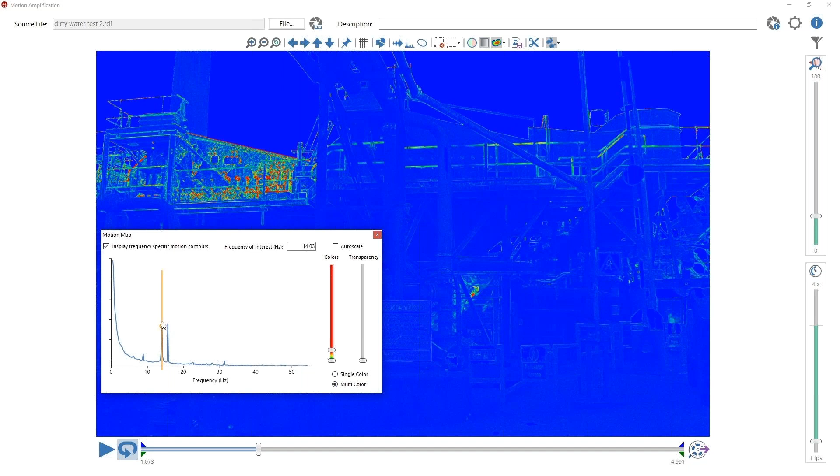And then finally, the last one is motion map. This is a cool technology that was requested by a lot of users, and it allows you to do a color map. So this is motion map, and you can show individual frequencies of motion. You can highlight it sort of like a thermal image. Red is more intense and blue is less intense, and show where the motions are, and this really helps you understand relationships. You can combine this with the motion amplification and the various other tools, but it's a real quick way to scan an asset or scan a scene and see all the different relationships between all the different objects.